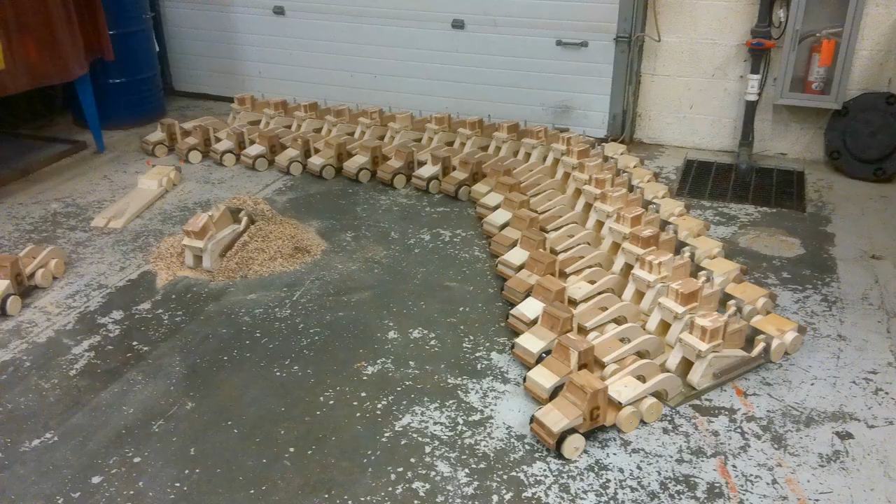21 tractor trailer trucks with a lowboy trailer that's detachable, and a bulldozer modeled after a D6 high track.

What an amazing sight.

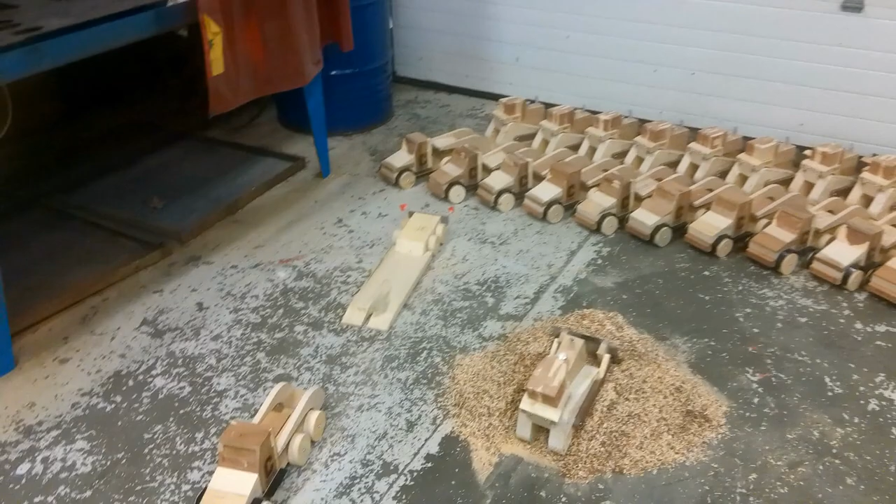My students have spent the last 8.5 weeks making these. Parts are CNC machined, designed by Candor, built by Candor students, manufactured and assembled here in Candor, New York. Like I said, 8.5 weeks of hard work to get to this amazing layout of 21 tractor trailer trucks and bulldozers. This is the largest and most complicated toy project we've done yet.

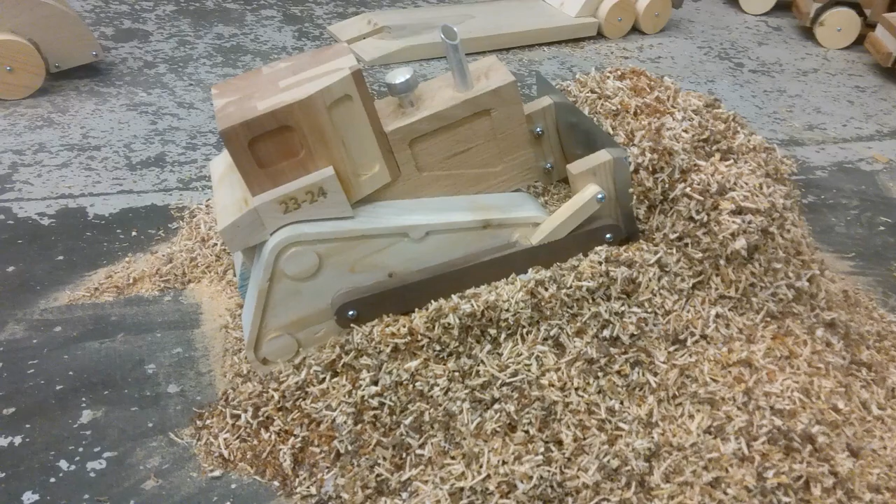Here's our bulldozer pushing material. Parts are CNC machined, manually cut, manually machined, assembled here. We'll take a closer look at what these look like and how they work. As you can see, our lowboy actually detaches, and a couple of my students decided to add the wide load flags on one of them just to show it off. Let's take a closer look.

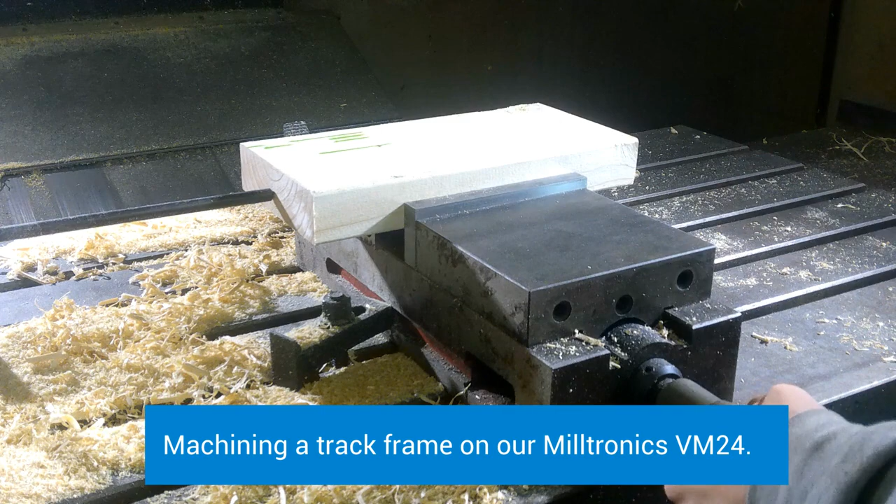We won't get that part.

When it's all done, push the big button.

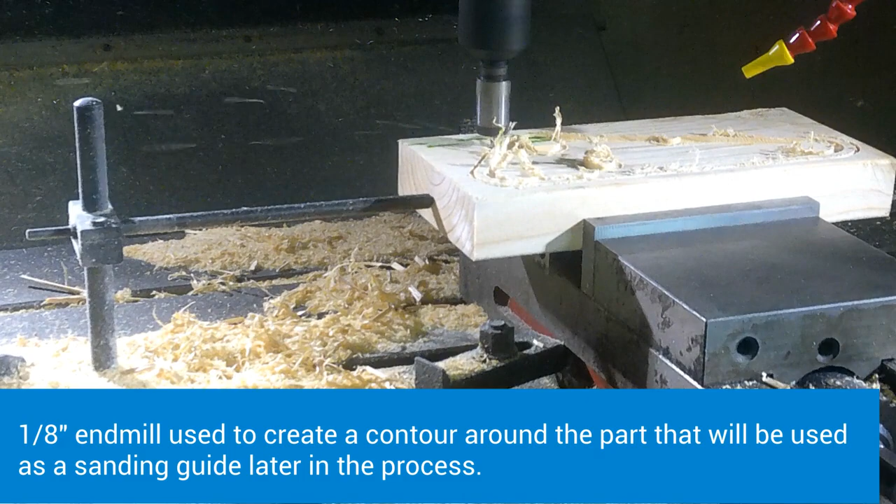We might do another one. Good.

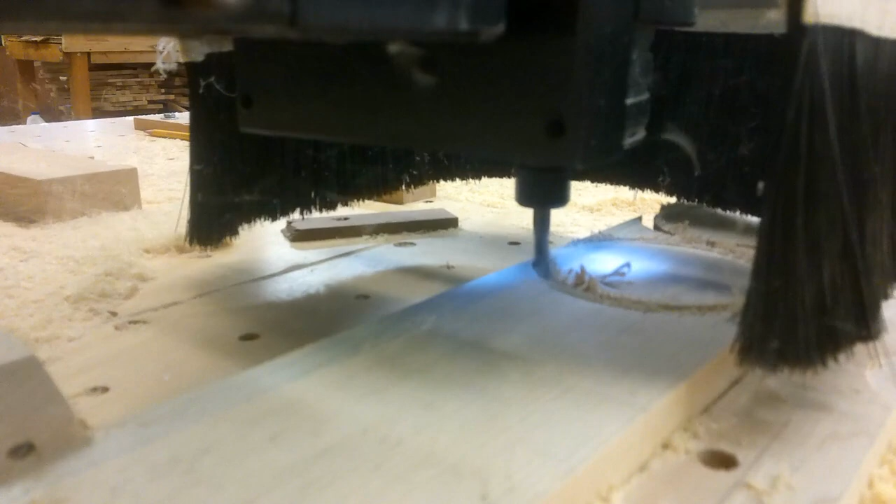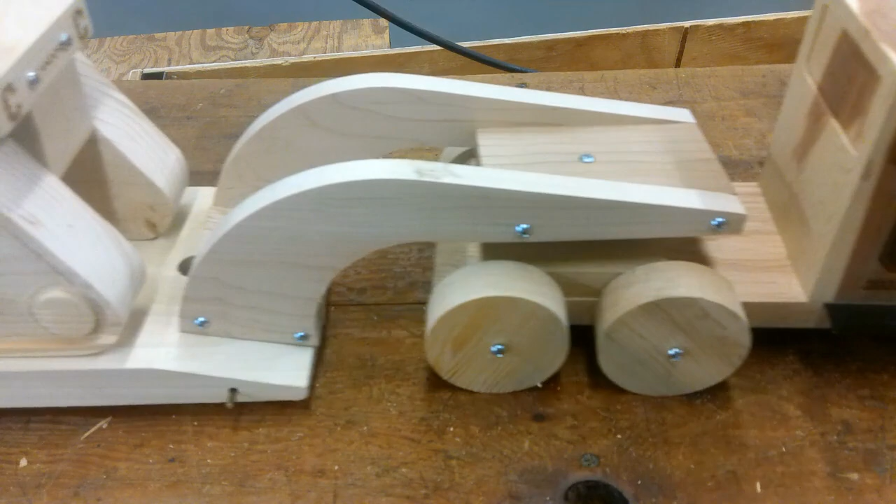Let's take a closer look at our truck, trailer, and bulldozer. Just rolling by here—this is our longest toy that we've ever built. It's one of the most complicated.

We actually made 2 different toys this year, a tractor trailer truck with a lowboy trailer and a bulldozer to go with it. Typically we only make 1 toy, but this year we made 2. Let's take a look at the truck first.

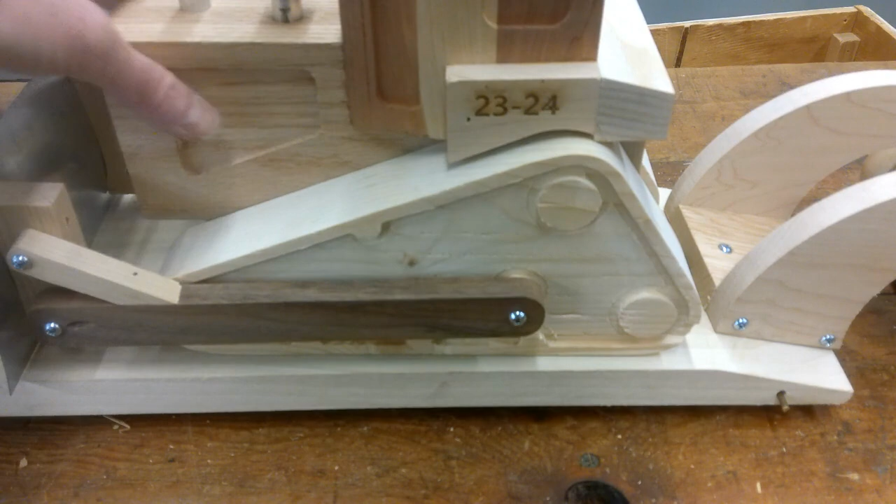Our truck is made up of an engine, cab, 2 maple fenders, and 6 wheels. We didn't go with dual wheels in the back—it's just a pain to do that, so this was much simpler.

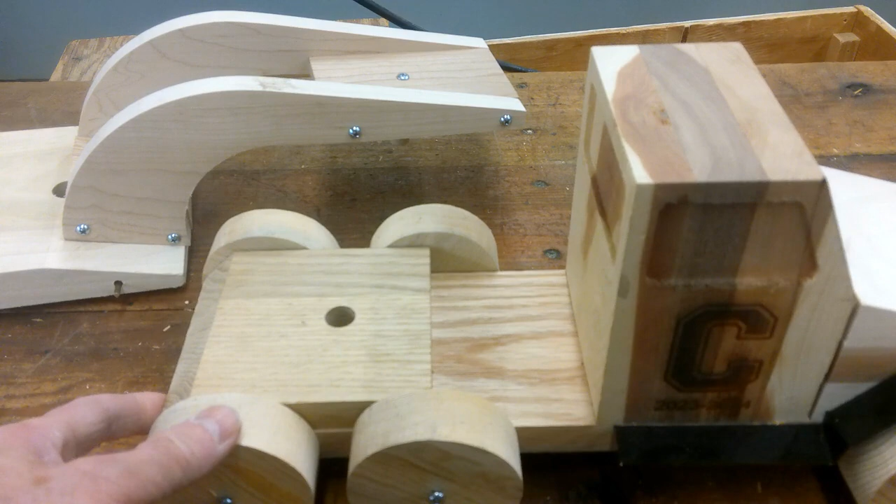We made a rectangular frame. We call this our 5th wheel mount. It has a little taper so that the kingpin, which is on our trailer, will actually go up on here and ride into the hole.

One of my students, while we were building this, he was machining the cabs, and we were machining the side windows, the front windows, and the other side. And he goes, 'Hey, why don't we have a back window?' So we quickly designed a back window, and machined that in too. So this went really cool as we worked forward with this.

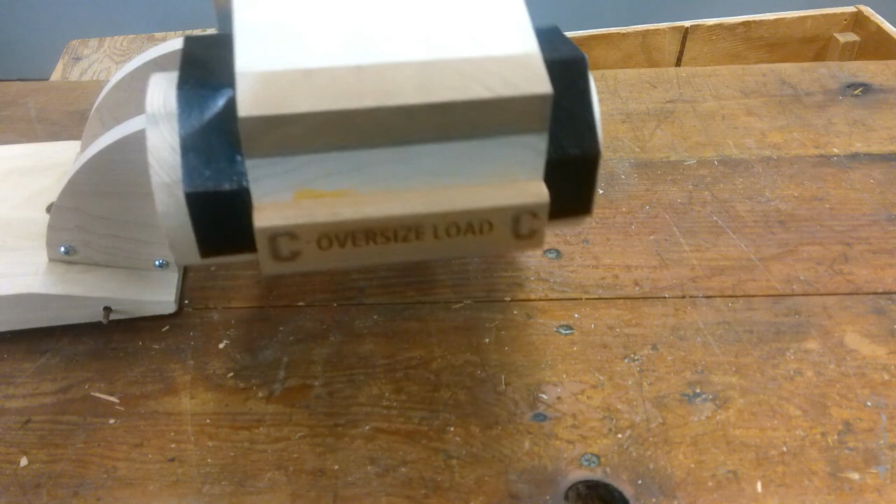Also, my student that built the engines said, 'Hey, we need a front bumper.' So we put our Candor C on the front bumper, put 'oversize load' on, put a little glue on, and nailed it on, and it's holding really well.

So that's our tractor. The total length of the toy is 43.5 inches, so the tractor is certainly a big part of that.

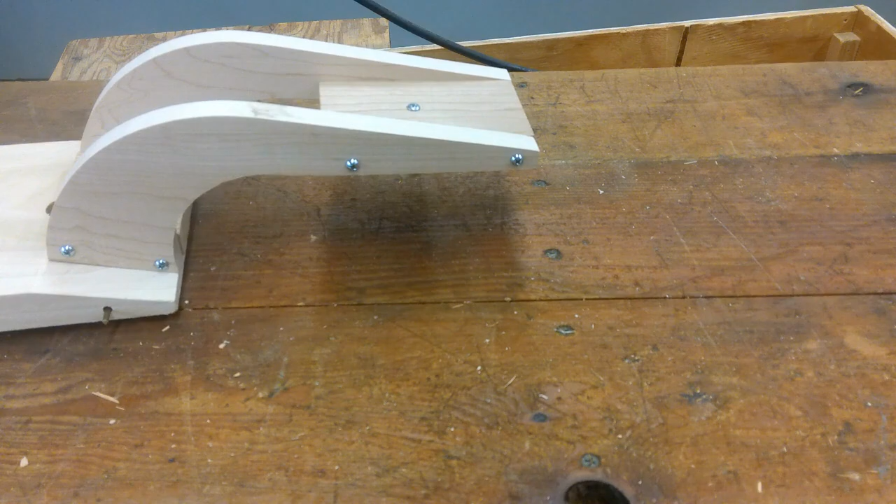Our lowboy trailer has a lot of machine parts, a lot of CNC machining here as well. We have our 5th wheel mount, our 5th wheel plate, and these are our arms. This actually comes apart, which is really cool.

We have a little pin here, so it's very similar to a real drop deck. We pull the pin, we can drive the trailer away, and then back in. A little bit of finagling has to happen here—you got to get it just right, because our tolerances had to be on the money so that this actually cantilevered correctly, so it would stay hooked up and off the ground while the truck is moving.

Some of our tolerances were a little off, so we ended up putting a popsicle stick back here to allow for that cantilever to work a little better. This is the only thing I don't like about the truck and trailer, is that it's hard to hook up. But it's no different than if you don't get a lowboy just right.

As we built this, one of my students said, 'Hey, we need a back bumper.' So again, we made a back bumper, put some taillights on it, put our Candor School District on it, and did that. We really like that.

This came out really nice. A lot of machining here. We CNC machined the notch in the back. All the wheels for the tractor and the trailer were CNC machined on our router. This was manually cut. The arms for our trailer were CNC cut and finished on a bandsaw and a sander. We're just real happy with the way this turned out.

We decided to put a screw in our kingpin just to hold it in better, because it is under a lot of force when this is going down the road. So we'll hook that back up and set that in the background.